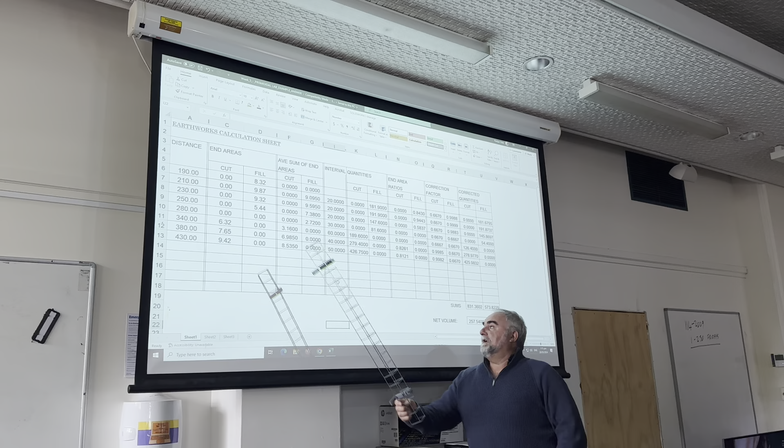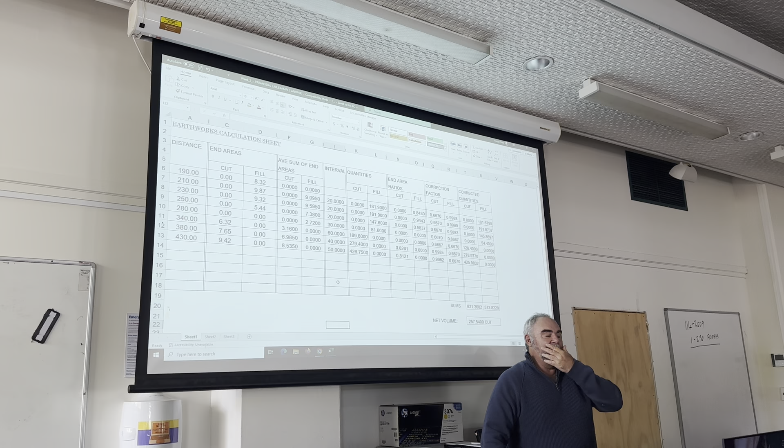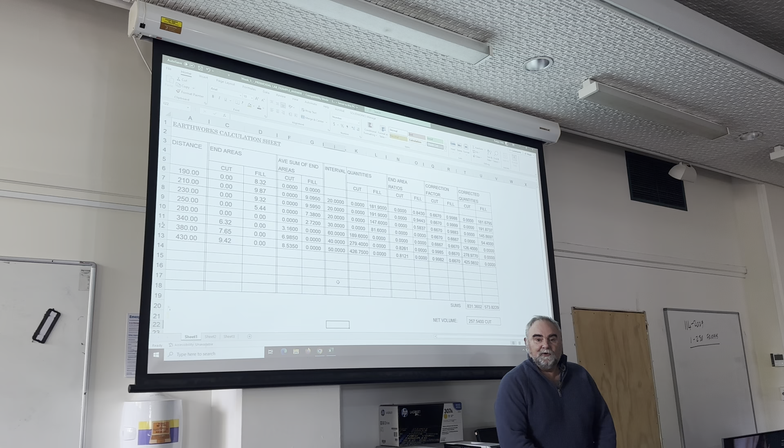Let's talk about the spreadsheet. Each row along here represents a cross-section in terms of an area. You all know how to get an area by going around with a polyline - you do a polyline around something, enclose it, list it, and it shows you the area. I think you would have done that with Ingrid in your civil drawings. So that's easy enough to find the area of the cut and the area of the fill. You're going to be doing slices or sections through and working out the areas in each case. That's cool - 1 mark for drawing that on the board with the areas beside each one of those sections. Obviously you've got a distance between them.

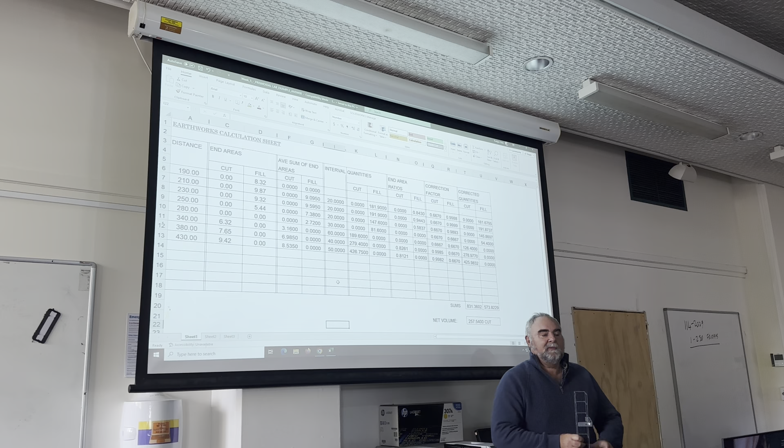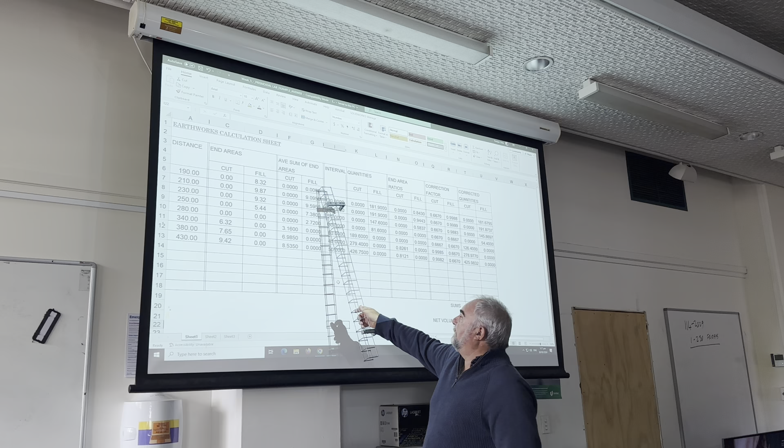So how do you put it into the spreadsheet? It's actually reasonably easy, not that difficult. One thing you need to note is that wherever you start from becomes a 0, and you always have to put these 2 zeros in there. So I said I would demonstrate it on the board, so I will.

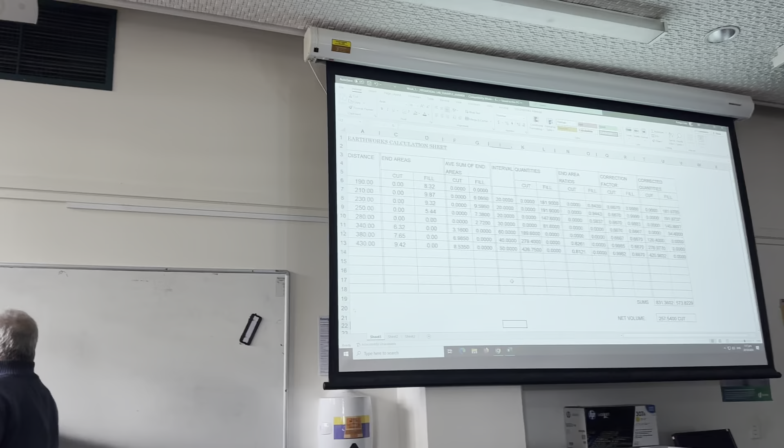What have I done first? We'll do it over here. So here's your lovely drawing of your platform, and your fill is going to be quite a bit bigger than your cut. Your cut might only go out like that - and I joked about that being butterfly wings, the butterfly going into the sun. Remember that from 2 weeks ago? Okay.

What I'm wanting you to do is take your first cross section through here. Now someone's going to tell me that's wrong already - you never put that bit in, so I hope you don't do that on your proposed plan. You only have a flag at each end. So the first cross section is going to actually be 0, which will be this one here. Now don't worry about the chainage at the moment, because the chainage for you won't be 190, it'll be 0.

The reason why that chainage is 190 is because it's along a road, and you're very rarely going to have a road starting at 0. Take State Highway 1 for example, it starts way down where my cousins come from, in the South Island, in a place called Bluff, and goes all the way up to the tip of the North Island, to a place called Cape Reinga. That's probably closing in on 1,000 kilometres, somewhere between 600 and 1,000, or 800 and 1,000.

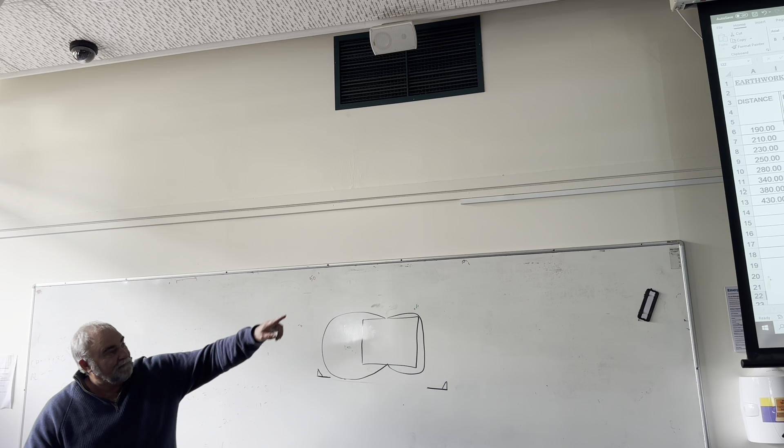Even just if they did some tar sealing on your local road, and they started at house number 10 and finished at house number 24, that also would have a chainage on it as well. So whenever you're talking volumes or roads, there's a very high likelihood that the first number isn't 0. So don't be confused by it.

I've tried my best to confuse you in the test because I play around with that first number, right? Just because I can, and because that's what you're going to have to get your head around if you're going into the workforce. In this case, when you're doing the first section, it'll be 0.

So that's easy, there's your first start point. Then you've already got one that goes through here, because that'll be section AA or BB depending on what you call it, and there'll be a last one that goes through here, the tip of that. Now those two are very easy to put in. That one is going to be your last one, and that'll actually be 0 cut, 0 fill. And the first one will be 0 cut and 0 fill.

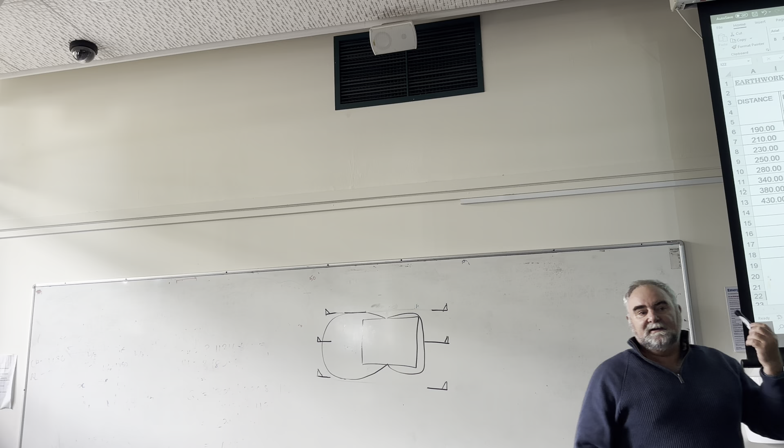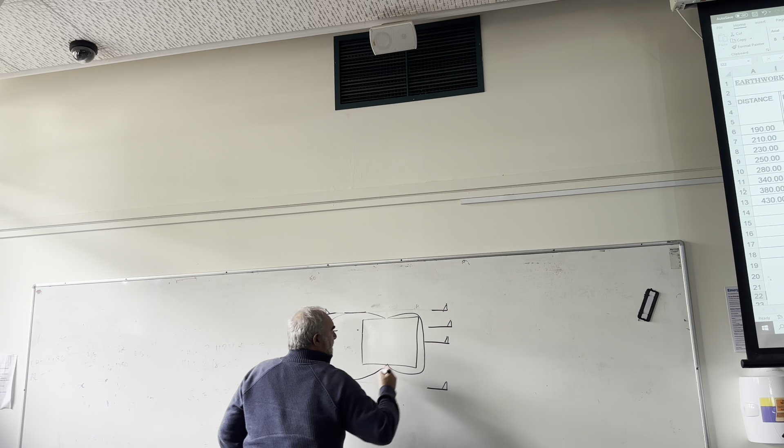In this case of the road, it's a bit different, there's a little bit of fill in there, so don't get confused by that. This is only me explaining that sheet and what you need to do for your assignment. So we've got 1, 2, 3. I expect at least one more going through here, one more going through here, one more going through here, one more going through here.

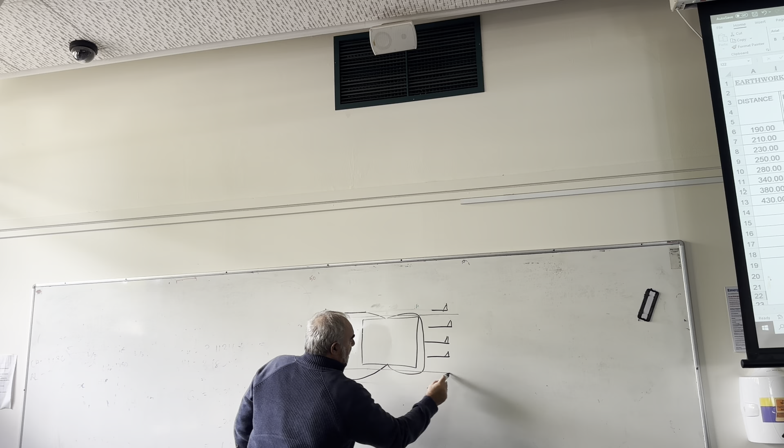And here's the golden marks, I want one that goes through there and through there. Now I've already demonstrated to you how to do the one in the middle, and we put the platform on, and then we put this on and we put that on. That was 1 to 1, that was 1 to 2, easy. We put a P-line around it, and we've got an area, P-line, area. That's that one.

The end one, this one, the in-between ones may be very different to that. What are these ones going to look like? Well, this is your only clue, they're going to look sort of something like this, because you're going to get a bit of cut and a bit of fill and a gap in between. It might be a bit different to that, but it'll have a gap in between.

What's the easiest way to draw it? Do it on a whole contour, because that line there will determine, that's a whole contour that you're going through there. That'll be the contour height there, and if you're going through another contour over there, that'll be the contour height there. Then you only need to use the batter slopes on the side.

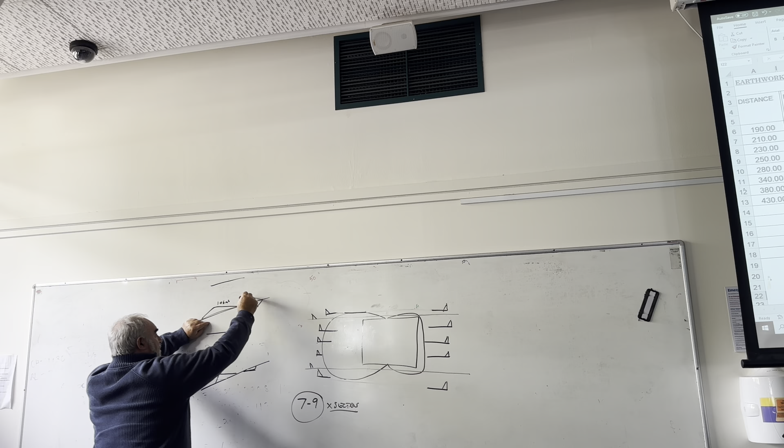Okay, so you're going to do, let's say 1, 2, 3, 4, 5, 6, 7. Somewhere between 7 and 9 cross sections. Each one of these, I want you to put the area on the top of them. And that's a mark for doing that correctly.

Now I'll let you in on a little secret. I will only be checking one. But usually I can pick the right one to check that you haven't drawn it correctly, just because I can kind of eyeball it, and let's face it, by the time I've marked 30 something, the one that's not right will stand out.

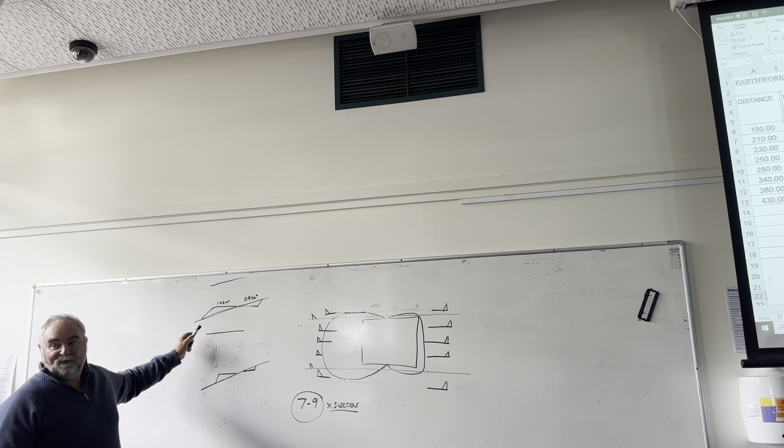Also, you need to remember what these distances here are, or at least measure them, because they will form your chainages.

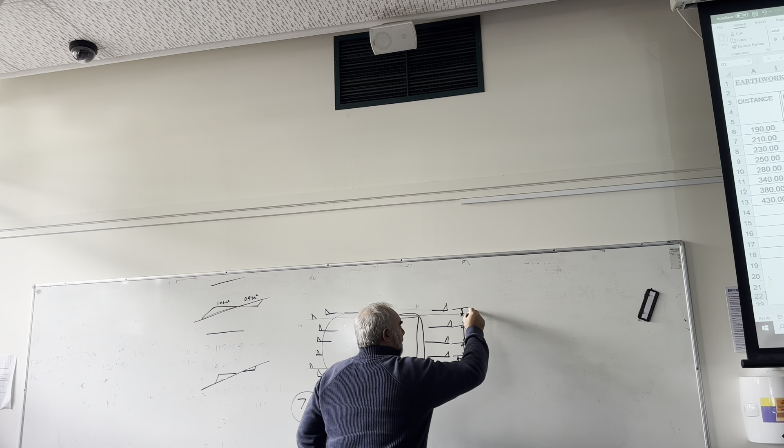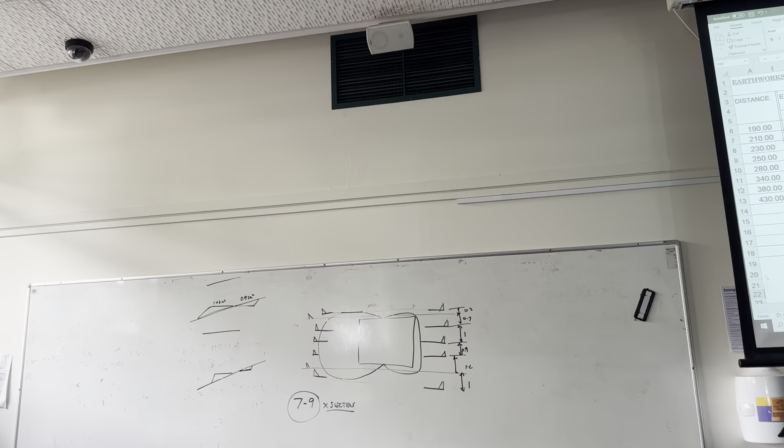So say that is 1 metre, 1.2, 0.9, 1 metre, 0.7. Well, they will be in this column here, the interval. That's the chainage, that's the interval.

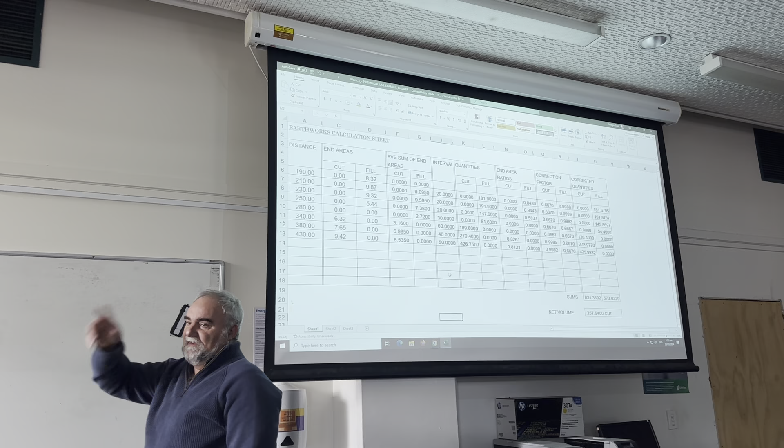To get an idea of what the difference between the two is, if I was to walk into the city right now, as I'm going past them, like, oh, that's 10 metres, 20 metres, 30 metres, you can hear me weighing the distance, 120 metres, 4 kilometres, whatever, that is a chainage, because I'm adding it up as I'm going along. An interval is quite simply the distance between each time I was yelling out a number.

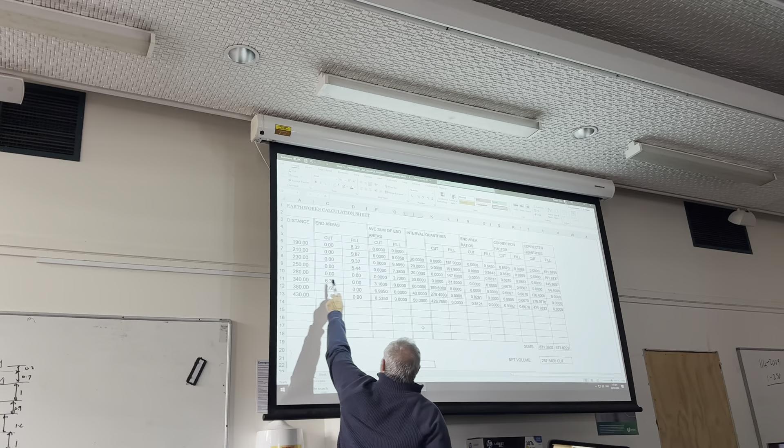That's pretty straightforward. So as you can see there, 20 plus 190 is 210, plus 20 is 230. Then it gets down here, and at the end there you can see 380 plus 50 equals 430. Now the cool thing is, if you put the two areas and the interval in there, this spreadsheet goes brrrr and gives you a number at the bottom. That's pretty cool, because you're only really duplicating your own work.

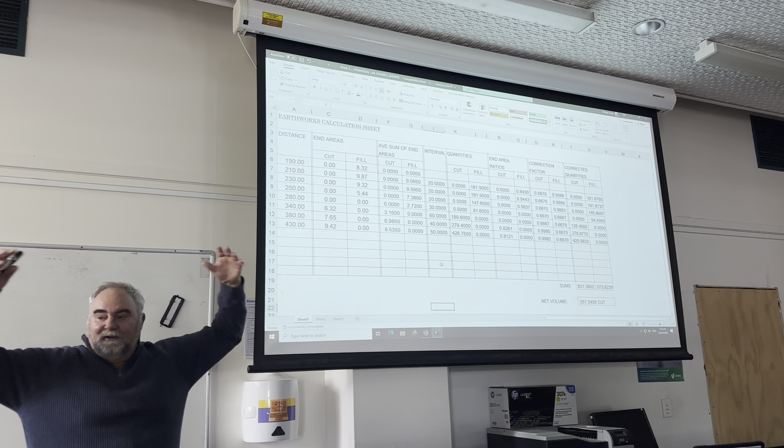So what do you get for doing the spreadsheet? Half a mark. What do you get for pasting it into your drawing? Another half mark. As long as it's about the same text height as your text in model space, I'm happy. If it's like this, and I can't see your drawing, and you pasted it over the top of the drawing, you'll get 0 marks.

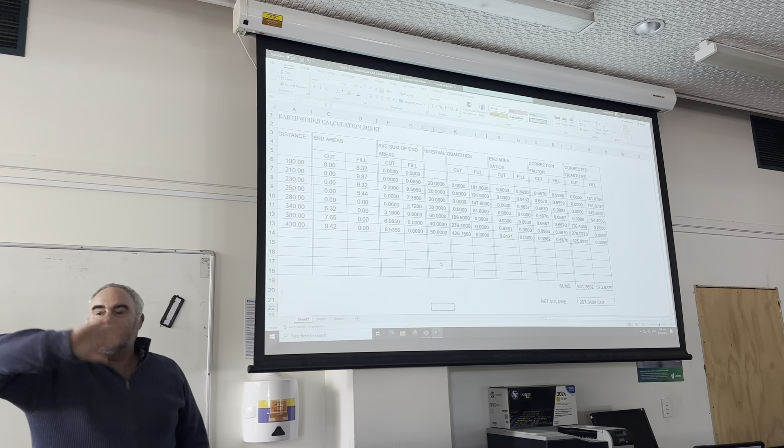And if it's that big, like, you know, I'm going to have to sort of stop everything, wipe the screen to see if I can see where it is. No, still can't see it. It's a tiny little dot. Well, you know, you're risking me not seeing it at all.

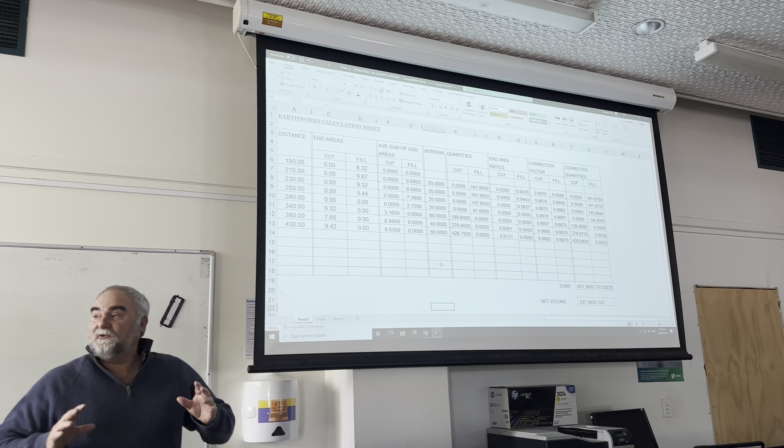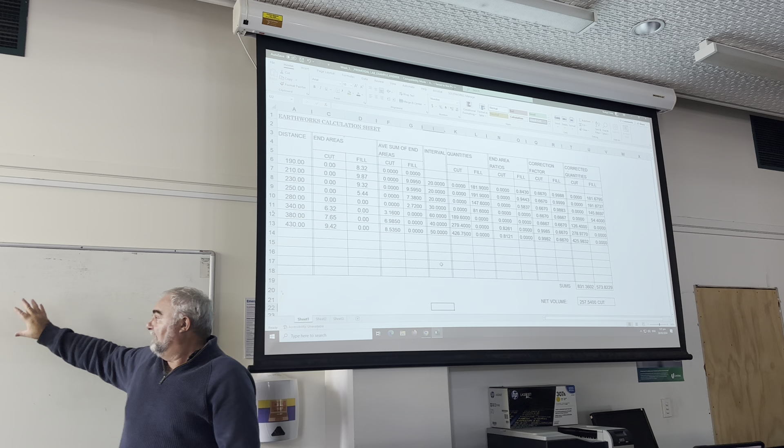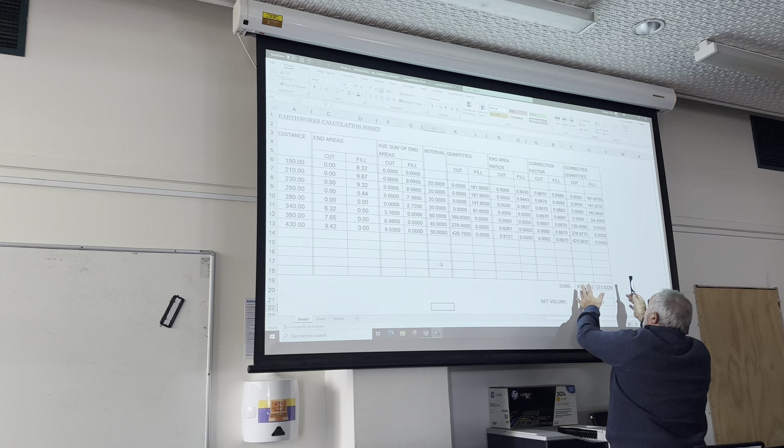So put it beside these. In model space, you don't have to do a viewport. In fact, if you do a viewport and all that, you'll lose marks. So that just needs to be in model space with the, in fact, I only want to see this bit, the corrected quantities. I don't want to see that bit, just this bit with the total.

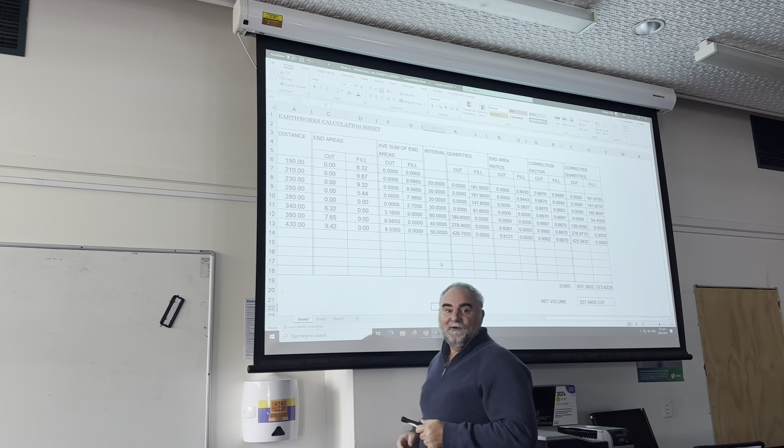Now, if that says negative cut, what do you think it is? Fill, exactly. Half mark whoever said that. So, yeah, and I just want to see that column over here, about that size, corrected quantities.

So I think, if I can't remember, it's on your assignment sheet. I think it's 3 marks, don't quote me, might be 2. Pretty sure it's 3. Easiest 3 marks you're going to get off me. But you've got to do your contours in here first on the butterfly wing, or else you've not got much show of being able to do that properly.

I do sheet 1 on everybody's. You know why? Because if I find out that one of those is not right according to your drawing, I'm starting to think where you got it from. Because it is very easy to go cut and paste from your friends and go, oh look, I've done the quantities right. And the other thing is that students get confused because they think that these numbers and these numbers here should be the numbers at the very end, but they're not.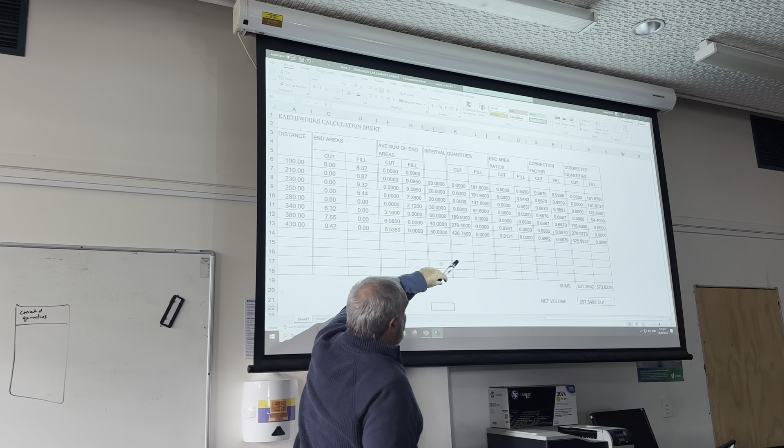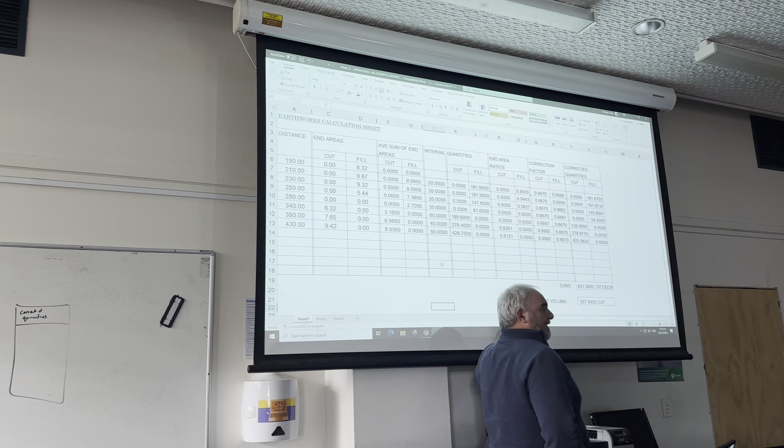This calculation sheet I'm going to go over in a few minutes. Now also this will be in the test, just to add a wee bit more weight to it. I'll be asking you questions from that in the test. So I might say, for example, how is an end ratio found? Or how do you find the final corrected quantities? Or what is the average sum of the end areas? Which I'm about to go over now, okay?

Now this sheet here is on Moodle. I want you to save it somewhere, even if you put it in downloads just for the moment. Open it up and we'll use colours because I think it's the best way of explaining it.

Most of you are probably, well, I'm making an assumption here. My father once said, never make an assumption, son. You're the one making the umption, but you're also making the ass out of yourself as well. So, yeah.

Don't necessarily make an assumption, but I will say most of you probably know some basic coding in Excel. But I'll go over it anyway, and I'll show you. There is a bit of coding in here that's come from the world mathematician champion, so that's pretty cool. I'll say that with hand on heart. He's actually written most of the software for 12D, and that's where the code came from into this. It's actually in Civil 3D as well. So both of the main programs used in Auckland are embedded in this little bit of coding in here.

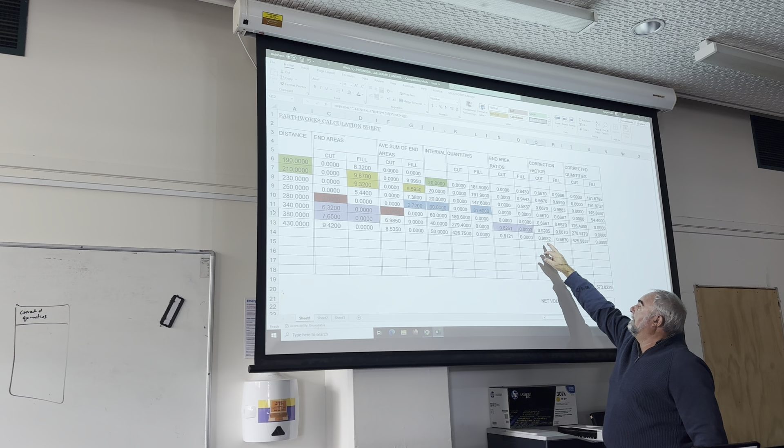But that formula up the top there is the one that I've been banging on about. And what it does is it adjusts each time for the row. It looks at that there. It looks at the size of the number. It compares it with the other numbers that are there. And it says that the adjustment is going to be this much, in terms of how much you have to adjust your final answer. So it is going to be that. This is the bit students think it's that times that. It's not. It's that times the cut there, 2749, and you see that there's just slightly less for that row.

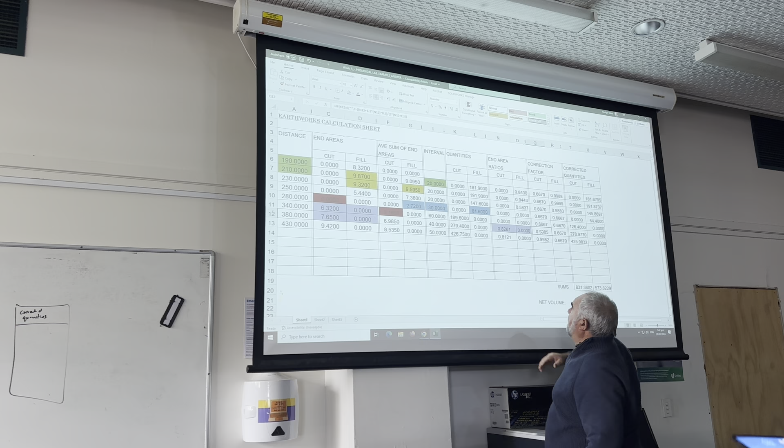Okay. So to find the correction factor, we need to find the end area ratio. Once we get the end area ratio, the correction factor will come in here. Note the correction factor for 0 is 0.6667. So that's the prismoidal. Of course, these add up down the bottom and they give us a corrected cut and fill. So that sheet should be available on Moodle for you all to colour code or do what you like with it. Take it with you.

If you manage to sell it to anybody, I want half the profit. I would say, having taught 2,500 students over the years, there's a fairly high probability that most people have already got this in some format somewhere trying to impress. Oh yeah, and by the way, you won't impress a boss in an interview either, because it's probably one of my students that's already got it. So that's not going to happen.

Rolling back to the class exercise, which has disappeared on me. Here it is here. This should also be there. So what it is is a housing development, and there's the numbers there up the top, and the answer is down the bottom, which is the same as what I had on the board before. So what you would need to do if you wanted to practice doing this is to make that a blank sheet. Keep the formulas in there, just delete the numbers that are there.

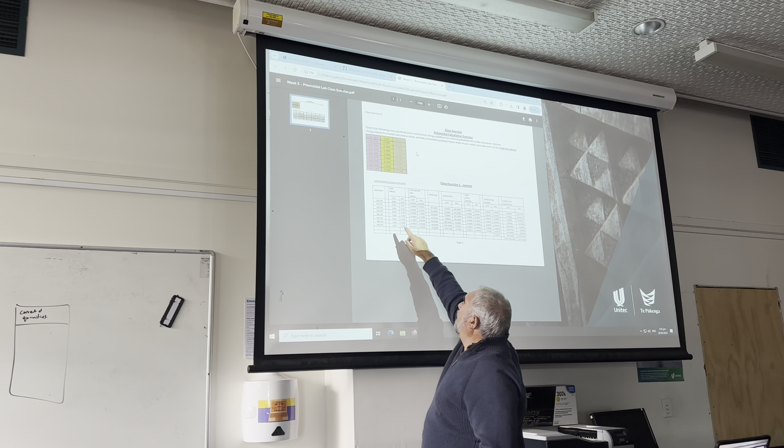Put that first row down here, second row down there, third row down there. Work out the changes and put them in, and the answer will flow across. So you could actually practice, without looking at that final answer, you could practice doing it before you did the assignment, just to make sure you got the hang of doing it right. All right? Fine, it should equal that.